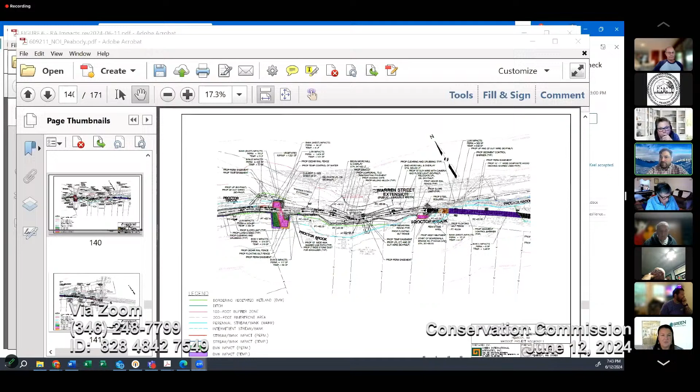While Danielle's setting up the plans, I have been on from the beginning. I was in the car for a while. I apologize, it didn't seem like I was here. I was coming from our master plan meeting at Higgins Middle School and trying to get home in time to jump on a computer, but I tried to talk when I was in the car and it didn't seem to work. I have been here from the beginning.

Sure, thank you Brandon. So you can see this was the plan we originally showed a month ago. This is where the boardwalk is. This whole area in purple is all wetland. So if we were to do a full span bridge that went from the western abutment all the way over and spanned over Proctor Brook, you would then have a very large abutment in the middle of the wetland. We would have significant increase in not only wetlands, but additional filling within the floodplain that would need to be compensated. So the analysis demonstrated that the boardwalk has significantly less impact to the wetland resource areas within this area, and doesn't result in a rise in the base flood elevation.

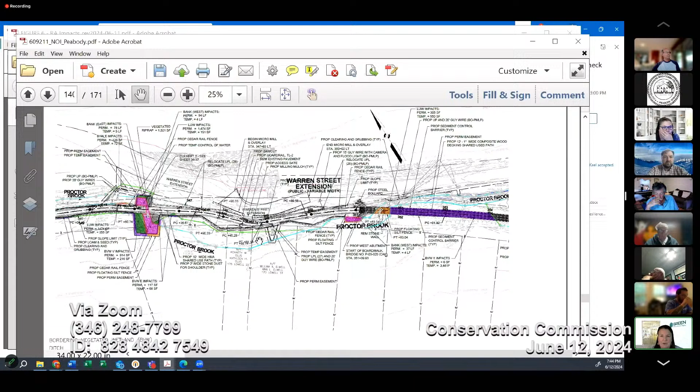In addition, the last thing they brought up was the concern of potentially the helical piles capturing debris. The one thing to keep in mind is this area right here for Proctor Brook is right upstream of it, just a couple hundred feet. You've got two other culverts that are much more constraining than this wide open section of Proctor Brook where the boardwalk is. So there's very little linear footage of Proctor Brook where debris could potentially be captured within this area. We felt that was a much more appropriate design with the least amount of impacts with regard to this last portion of the area.

So that was in our response letter to DEP that we submitted yesterday with regard to that. The third item they had talked about was asking with regard to stormwater, if any additional stormwater components could be done within the area. I think what they didn't understand, they were asking, could some crushed stone filter strips or anything like that be added along this?

I think what they didn't understand is the actual pathway is a 10-foot wide paved pathway, but the shoulders are 2 foot wide and they're actually stone dust, over an 8-inch gravel base. So those are pervious and will provide some infiltration. We don't take credit for it, they don't meet the standards with regard to recharge and stuff like that, but they are permeable. They will help infiltrate, and they're all along the entire pathway. It's a sheet flow condition, so as runoff sheet flows, there will be some infiltration with regard to the pathway. I think once we explained that, it seemed to appease them better with regard to meeting the stormwater.

And really there just isn't any other area within this corridor because of the site constraints of Proctor Brook. The only other item that DEP brought up, not during the meeting but in their letter, was we had a proposed paved waterway that they just asked us to convert to stone. A very small change, we changed that, so that was one of the plan changes in there.

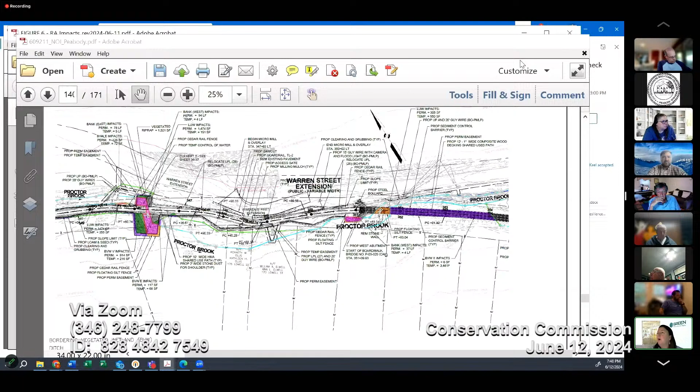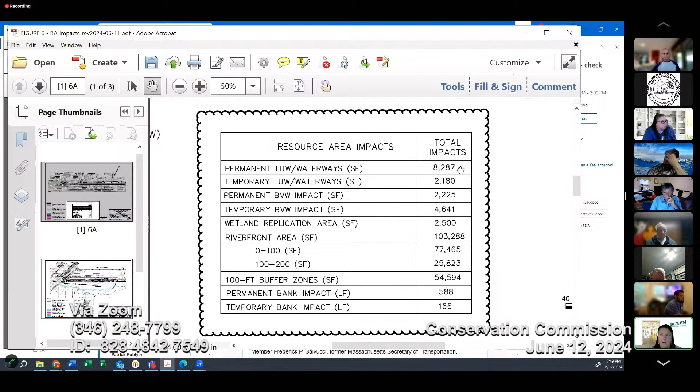Along with that, we submitted updated plans. I'll start with the figures. There were 3 figures updated from our original notice of intent submission. Figure 6A was updated, and the only thing changed was the impact table, just to show the reduction. We reduced land under water permanent impacts by about 2,000 square feet, and we reduced bank impacts by about 30 linear feet. So that's what this table is showing, just a small reduction.

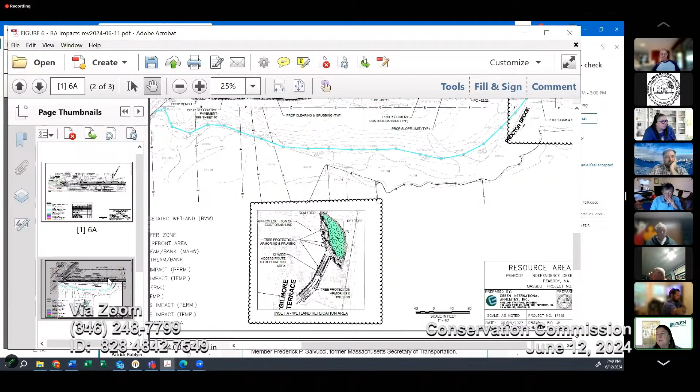The wetland replication area, which was previously up in this corner, has now been removed and is now shown in the offsite wetland replication area parcel that we talked about. This is just showing the reduced impact. You can see this dashed red line showed the original extent of riprap at culvert 1 that we were able to bring back, bringing it closer in with regard to the riprap for culvert number 1. Along with those changes, these are the 3 main figures that highlight everything I talked about.

There were 13 plans. These are the plans that we've just clouded, and basically I can go through them, but they just show in detail what I just described. So I guess with that, I'd like to open it up to questions that the commission might have.

I have a question. What is the boardwalk material going to be? It's going to be a timber boardwalk. It will be timber, yes. No possibility of using a recycled material, something that doesn't rot, crack, split, requires no maintenance? I believe that wasn't used because of slipping. I believe that material was looked at some point, but if it gets wet, people can slip and fall and hurt themselves.

What are they doing out in the rain? Walking on it anyway. Okay, so it will be wood, and it'll be the same as every other boardwalk and the bike path, correct?

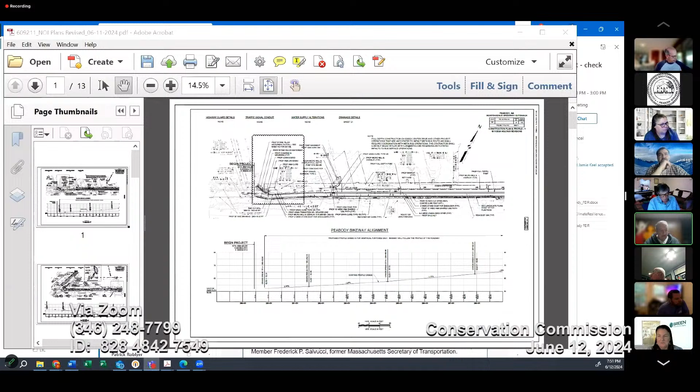I'm not sure if it's the same as every other bike path. I don't think there's any wood on any of the other bike paths. I don't believe there is. Yeah, there's wood - over by where I live, the bike path from Crystal Drive, as it crosses over wetlands, it's wood. I'm not familiar with that section. Okay, it's not important. Okay, I think you've done an excellent job of explaining, Danielle.

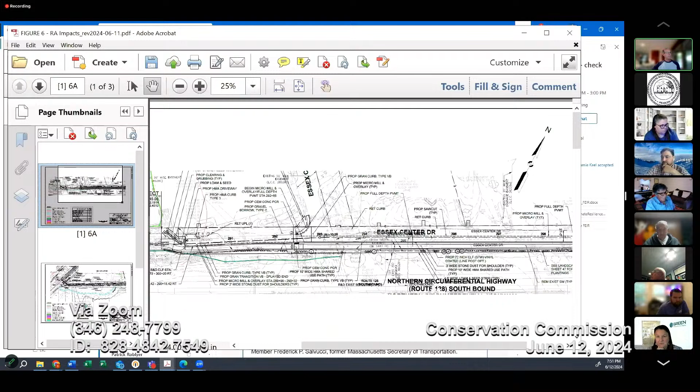Thank you. Anybody else on the commission have a question? I have a question - go ahead. The presenter, Danielle, you explained riprap would be underwater. You were mentioning that idea earlier in the presentation. Could you elaborate about that, why that would occur?

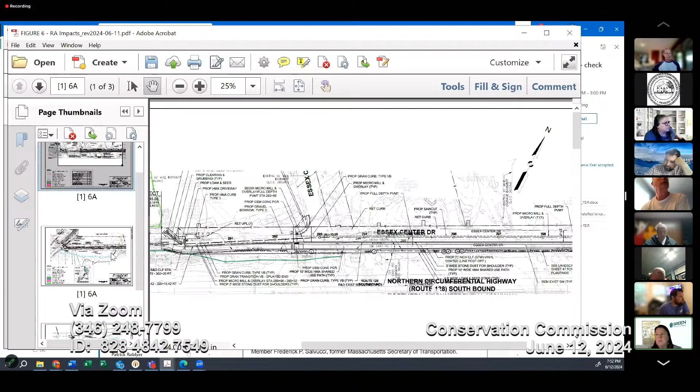Sure. So basically, I'll go to this culvert - this is the biggest culvert in the project. You can see what's shaded here in the pink/magenta color is the limits of the riprap. That riprap is basically being placed for scour and erosion protection. Currently there's a significant amount of velocity going through there, enough to cause erosion and scour around the area. So we will place the riprap in those areas, but we will also place it deep enough to put 12 inches of natural stream bed material over it.

So at the end of the day, you're not going to see the riprap. It's going to be there for the scour protection. You're just going to see the natural stream bed material. And that's mainly to allow for more natural habitat and everything to continue to flow through Proctor Brook in a more natural condition. So only in extreme dry areas would it be exposed, but most times it will be underwater.

So does that obviously still prevent the scouring and the erosion? Yes, if you get a really big storm, you may have some natural material move downstream, but the whole point is to have that riprap under there so it doesn't continue to take the rest of the culvert, or the area doesn't continue to erode or scour away. And then over time that will fill back in.

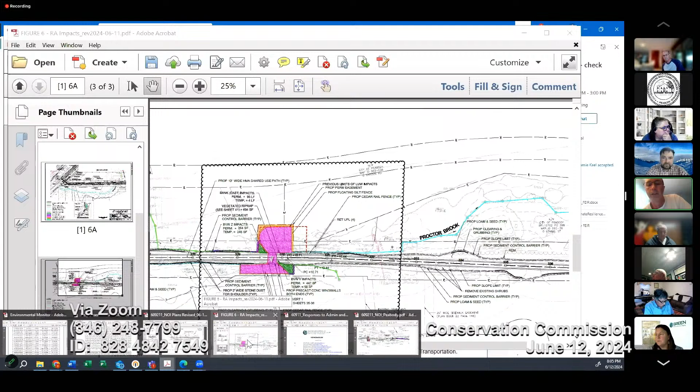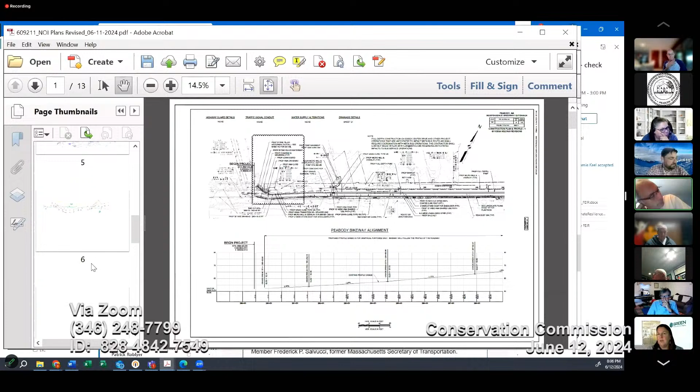This is a question for Danielle. Looking at one of the site plan sheets, for landscaping, the wetland replication plant list, it lists sumac, but smooth sumac. To me that doesn't seem like a recommended native plant to put into a wetland, even though it is a wetland plant. Am I mistaken, or is that a native plant?

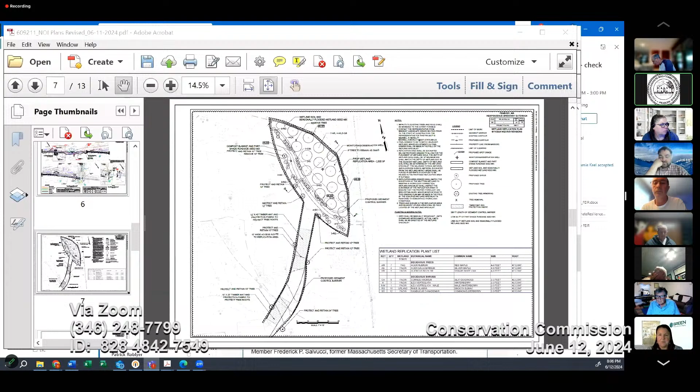I'm going more to stormwater, yeah, but I can absolutely ask our wetland scientist and landscape architect about that. I know she typically always does native plants, so I'd be surprised if it's not native. She's very conscientious about that. To me, I just remember sumac being like an invasive species, but maybe this is a different one. Oh, I did just get a message, it is a native plant. Yeah, and sumac, I've watched birds devour it, it's around here.

Okay, great. So if there's nobody on the commission who has more questions, or nobody from the public who wants to speak on this matter, then I would make the motion to close the public hearing. Second.

Roll call. That motion was made by Mr. Rizzo, seconded by Mr. Vivaldi, correct? Yes. Roll call: Chairman Lazaris, yes. Vice Chairman Rizzo, yes. Secretary Vivaldi, yes. Commissioner Comac, yes. Commissioner Athos, yes. Commissioner Cassidy, yes. And Commissioner Harrop, yes. All right, so it is closed 7-0.

At this point, I will make a motion to issue an order of conditions for this project, items 1 through 50, adding checklist D with regard to removal of debris - even though it may be covered somewhere else, just to have it in there for now, in case you need to take it out, by recommendation for debris removal within the channel or the culvert during construction. And the other one would be checklist J regarding dewatering.

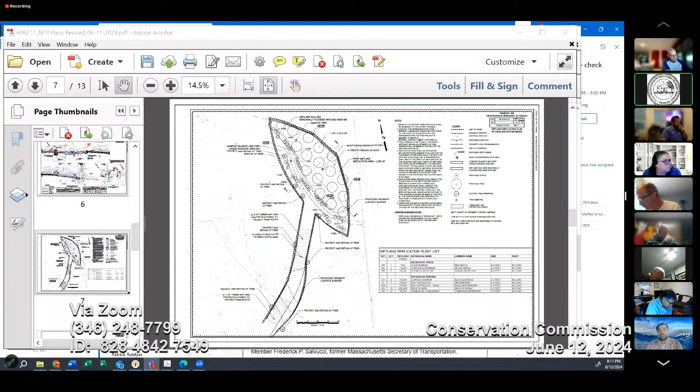Very good. Before you move on to the next item, I see Bill Manuel is here. If you want to go back to 24.5 North Central, since there are residents in the neighborhood, back to you, Danielle and Brendan, if you wanted to say something to close this out.

Just wanted to thank everyone. We really appreciate you listening to this, and we're excited for the project to move forward.

Thanks, guys. Thank you. We really appreciate you. Nice job. Equally, thank you for listening to this tonight, appreciate it. I want to thank everybody for their contribution. Danielle, you did an excellent job explaining it to us tonight, and the remedies you came up with should make for a very good project. I look forward to the ribbon cutting. Me too. Thank you. Have a good night. Good night.

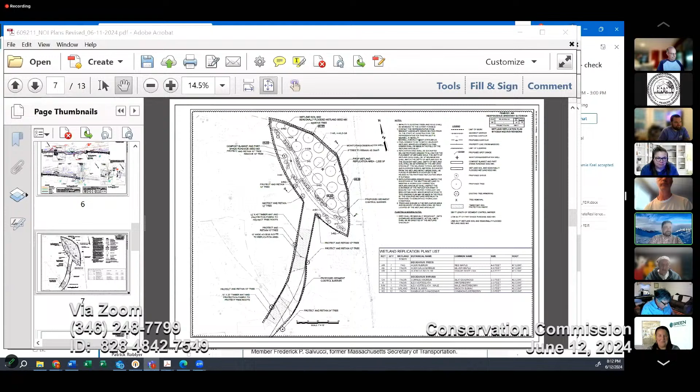Okay, you said you want to go back to item six? Yes, please. I just promoted Bill Manuel, 24 and a half North Central, to a panelist, so he'll take it from here. All right, let me read it first.

Continue public hearing on a notice of intent submitted by Wetlands and Land Management, Inc., William Manuel, for JND Real Estate Solutions LLC, John DeCoulis. Proposed work is demolition of an existing single-family home and redevelopment of the parcel into 3 townhouse-style units with access driveways, garage parking, landscaping, stormwater management facilities, and new utilities. The work includes 650 square feet of filled wetland and replication areas. Property is known as 24 and a half North Central Street, map 64, lot 28, Peabody, Mass.

Bill, take it away. Thank you, I'll share my screen. This project's notice of intent was actually filed back in January. We deferred beginning discussion because the project went out for stormwater management peer review. Since then, we've received DEP comments. It was initially filed as a 3-unit rebuild, which has been reduced to a duplex, 2-unit rebuild. I'll get into the particulars. The commission will remember that last year they issued an ORAD to define the wetlands on the property.

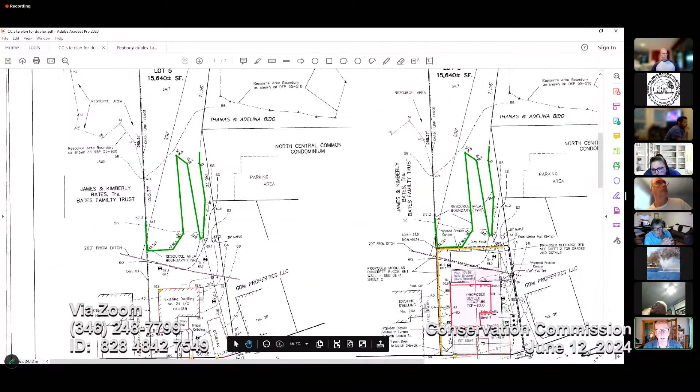There is bordering vegetated wetland outlined in green here, and an intermittent stream ditch that was ordinance-regulated. It's not a river under the Wetlands Protection Act, but the commission does regulate and apply riverfront area to intermittent stream ditches, so there's one along the old rail line out back. That 200-foot locally protected riverfront area is this line here. Jumping to the proposed plan, I'll enlarge it. Our first proposal was for a 3-unit building with a driveway running down the side, involving about 650 square feet of wetland alteration in this area, and this high ground area would have been removed for wetland replication.

As I said, we've got comments from DEP, and they did not appear favorable to the project as a 3-unit building with wetland fill. So we've scaled that back to the duplex.

Each unit would have a 10 by 20 deck, so it's a 10 by 40 deck off the rear of the home. That deck is a full story above grade.

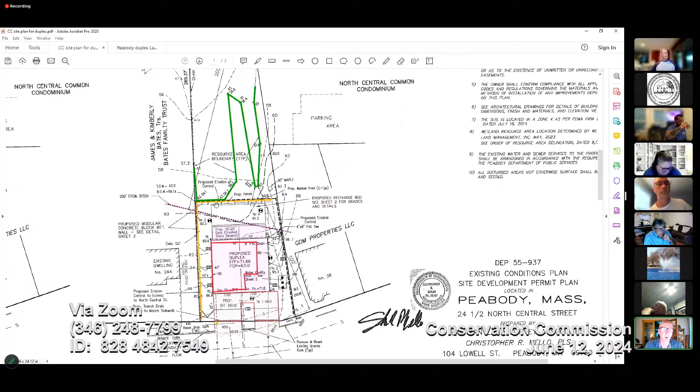You see that there is no longer any wetland alteration, so there's no longer any wetland replication. What I've done is superimposed the existing structure onto the proposed, so you can see we've situated the proposed building essentially over the footprint of what's there now.

The parking has been relocated from along the side of the lot to in front of the lot. There is an increase of about 900, almost just under 1,000 square feet of new impervious area, and that's all been mitigated by the stormwater management BMPs we have proposed.

There is a trench drain right along the property line, the street line, that collects any runoff from the driveways. It sends it to this water quality inlet, an oil and grit separator. Water is then discharged to this infiltration bed at the rear of the property.

Roof water likewise is collected and then piped directly to this recharge area. The project is only 2 units; we're not required to address stormwater management, but we have.

The engineer has provided a lengthy stormwater document that shows that through the use of these BMPs, particularly the recharge bed, we've reduced peak flows from existing conditions on the property by a small amount. We have also reduced runoff volume by a small amount.

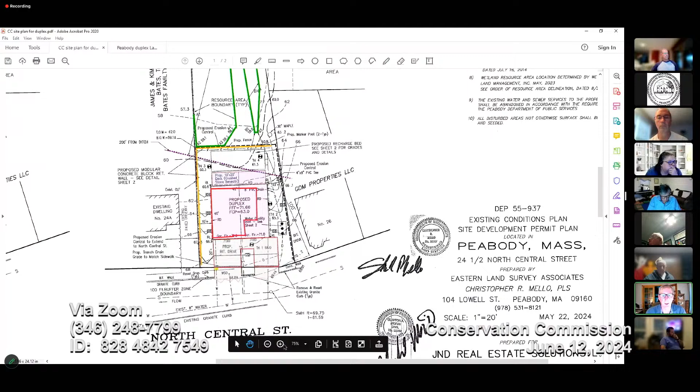The other thing you mentioned, Mr. Rizzo, about the swales - these are very subtle. You could see the adjustment in the proposed plan, let me enlarge this a little bit. There's a V-ditch on the left side, and basically a swale on the right side, according to your contours. You can see the adjustment from the proposed, which is a solid line, versus the existing. There's very little change in grade here, just enough to make sure water doesn't flow onto abutting properties and is directed towards the rear of the property.

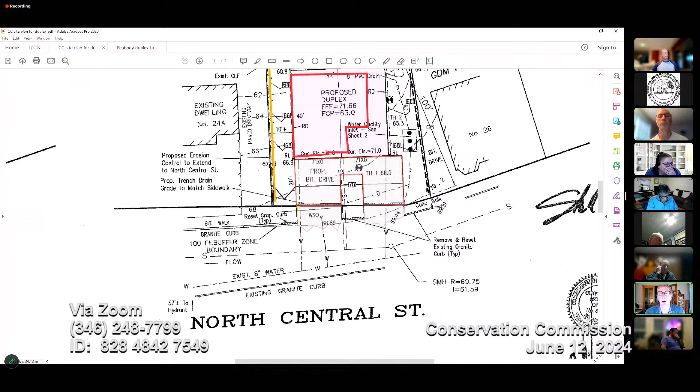Same with over here - you can see there's probably about a foot of cut here. I don't know that we even need that much, but it's intended to make sure the water doesn't shed laterally towards the abutting properties and is directed towards the rear where this vegetated wetland is. Remember, commission members, the previous owners were maintaining the wetland as lawn. It's getting a little scruffy now and coming in as a meadow, which will look pretty nice once we give it another season or two - it's going to look like a fairly nice meadow. But that's our plan, to direct the water down towards the back of the property.

10 feet to the sidelines - anybody that can run a machine certainly can operate within 10 feet, but your point is well taken about this excavation being close to the property line. We should take a look at that.

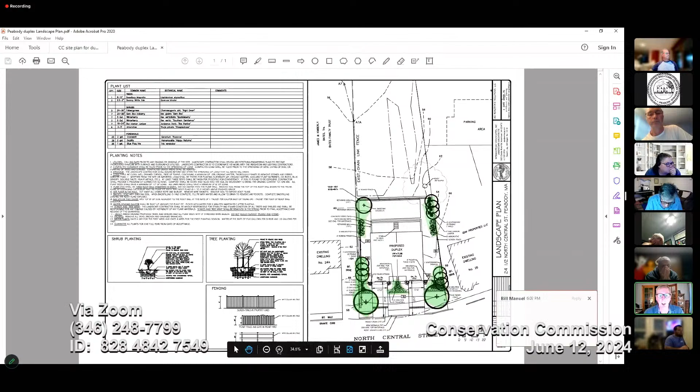So here's the landscape plan. Thank you for taking a look at it, because it came hot off the presses just a couple of days ago, and we wanted to get that into your hands. Again, a landscape plan for a project of this nature is not required - I agree - but we wanted to give some thought to it and show how the property is going to be restored. It's intended to provide a little bit of privacy and screening between the two properties, with nice trees up front and some vegetation along the sidelines. There's not a whole lot of landscaping involved here.

Just some - their plants are called out - 3 winterberries, 7 junipers, 3 arborvitaes. There is a screening fence along both sides. Same sort of plant density over here, 3 arborvitaes. And some over here are more perennials, daylilies and irises. So it's a nice combination of shrubs, perennials, and some nice street trees.

And the plantings on the right side of the property - you don't think will interfere with the underground storage? No, these are closer to the front - the winterberries, they're a shrub, closer to the front, close over in here.

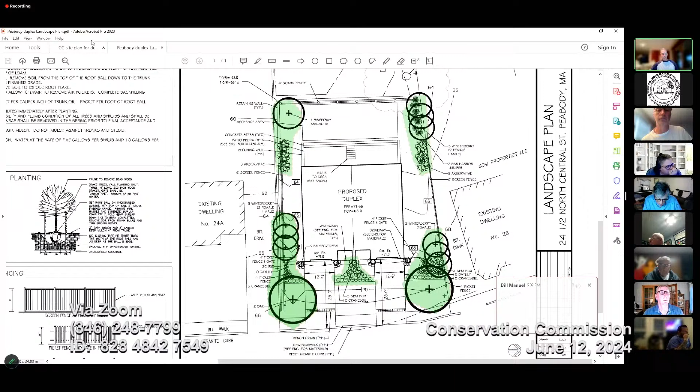Another thing I was looking at is the operation and maintenance document, the report that goes with the project. It's good and very detailed. I really question who's going to be responsible for maintaining that O&M plan and abiding by it, because you have this trench drain at the end of the driveway that's going to collect drippings or oil from a vehicle. So it's like a separator.

So that's going to need to be maintained, and I just know how that stuff happens—it doesn't get maintained. And then you say there's also no car washing. How are you going to tell somebody that? I can't imagine somebody owning a car and not wanting to wash it in front of the house. So it's a good O&M plan, I just don't know how it's going to be managed properly.

Well, there is going to have to be agreement between the two property owners about how that is going to occur. I'd imagine the order of conditions might say something to the effect of provide a framework of agreement that the property owners would enter into. Again, the stormwater management is not something that's required, and if you think it's unworkable, we could always eliminate it and just run...

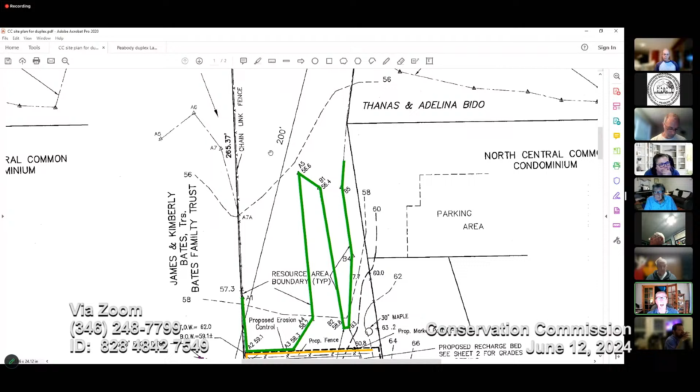Yeah, and no question, we saw in the springtime that there is flooding probably beginning right about here at flag A5. There was standing water, at least when I was flagging this, there was standing water in the back here, and it saturated the surface—that's why I called it wetland. So no question, a high water table. This site's being elevated so that we'll be able to recharge into dry ground. The swales along the side and reduction of runoff volume from current conditions, as well as reduction of peak flows—these are all improvements with respect to stormwater management above and beyond how the current site's operating now.

Do we continue this till we see the next set of plans?

That's okay with me. Does anybody else have any questions? I've got to open it up to the public for questions. I have some questions, okay.

Are you guys asking them to revise it? I think it has to be revised. I don't think it can be built the way shown. I think the constructability of this is in question.

Okay, so Bill mentioned the water quality inlet needs to get moved so that I can cross off this sheet piling condition, correct? That's got to be engineered to see that that's doable. Yeah, we'll either move that or give you some better detail on it.

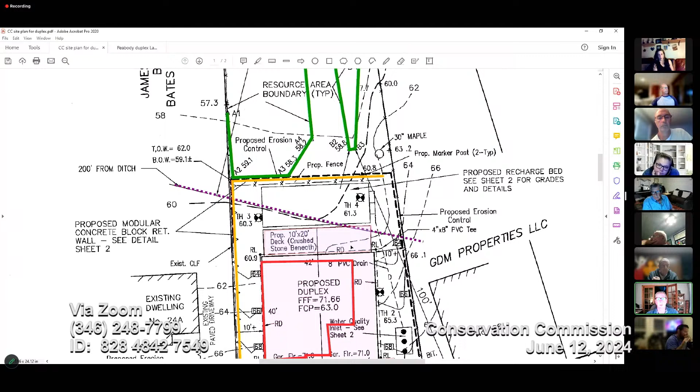Okay, I have a couple more questions. So that kind of segues to the erosion controls. I don't know what the detail is on this, but I was thinking we'd probably need one of the larger logs, not just the 8-inch or 10-inch - I'm thinking a larger one with a silt fence behind it, just because there's a lot going on. It looks like the whole thing is going to get excavated, there's going to be so much work done.

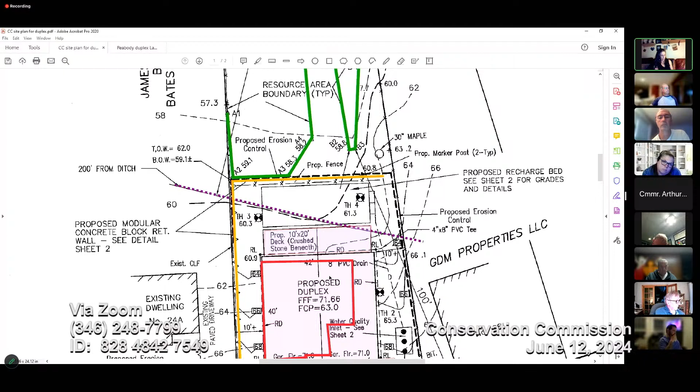And then there's not a swale detail - forgive me if this is a stupid question - but is there some sort of generic swale detail you can put on this, so that in the future, if I'm still the agent, I'm not fighting with the contractor about what it's supposed to look like? Yeah, we can do that. Yep, because you actually have two different kinds, one a V ditch and a swale.

All right, and then my last question I think is the dewatering - is there a dewatering detail? Because if not, I would suggest we have some sort of a dewatering plan and detail on that detail sheet. Okay, another valid point. We probably may need to dewater for the foundation. This is going to be above the water table so we might not get into it, but we'll definitely get into it now that I'm talking myself through it. So, dewatering detail.

Any more questions? I think that's it from me, but if you wanted to open it to members of the public, and tomorrow I can send an email to Bob. He knew my meeting was tonight, so I don't like to press people to get me stuff. I let people do their job on their own, and I'm not his boss, so I didn't really want to press him for it. I figured if he had something, he would have given it to me. But I will email him tomorrow because you guys are asking for it. But at this point, I would open it to members of the public.

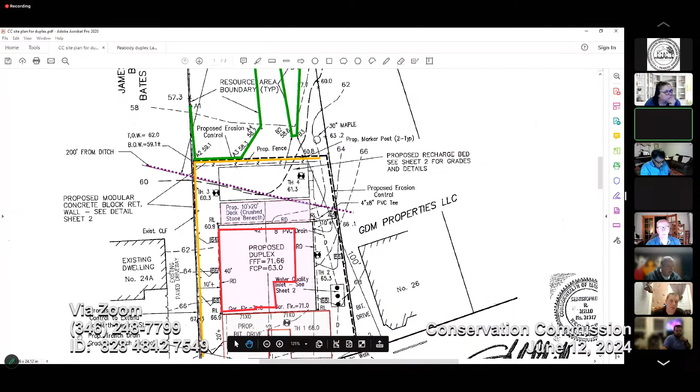Item 8, continued public hearing on a notice of intent submitted by attorney John R. Kelty for Josephine Cook, the owner. Proposed work is the construction of a single-family house with associated utilities, grading, and driveway. Property is known as 29 Glendale, also known as 25 Glendale Ave, map 120, lot 27.

Through the chair, I received correspondence from Attorney Kelty asking to continue this until July 31. There is still some holdup, I'm not sure why. We asked him back in April or March to go to ZBA to confirm that they were aware of that 2003 decision. I believe he's going there for their July meeting, and hopefully he'll come back to us with his relief, and then we'll go from there, whether you guys want to vote on the plan as it stands.

So from what I understand, we are still waiting for ZBA to confirm that they were aware of that 2003 decision. Attorney Kelty sent us a note saying he wants to continue to July 31st. Is that correct? Yes, correct. So I need a motion to continue.